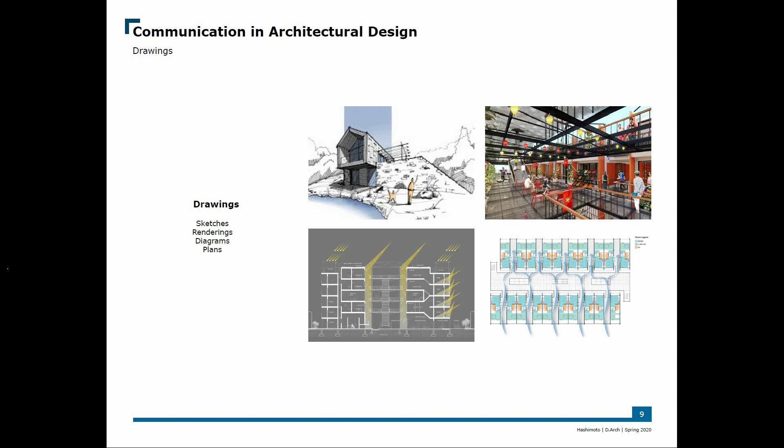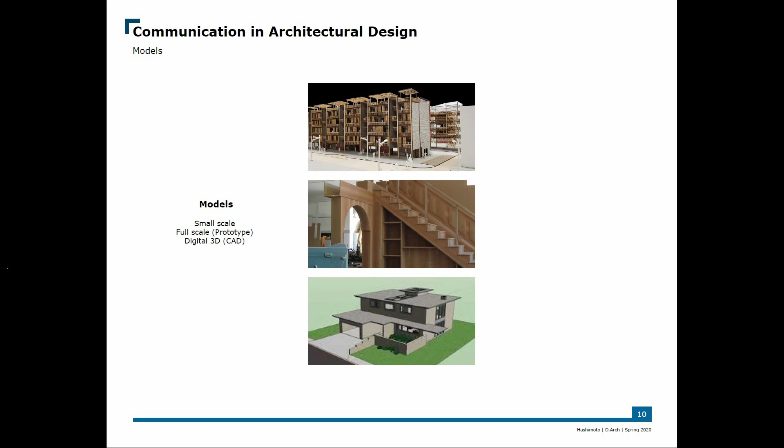Michael Polanyi informs that tacit knowledge plays a critical role in social communication, which is directly relative to the collaborative design process and communication. The integration of tacit knowledge may be reflected in the role of the designer and how they graphically represent intended designs. When the designer is conveying that idea, it is left for the client to reinterpret and articulate the embodied design intention. Those intentions may be lost or otherwise altered during the translation.

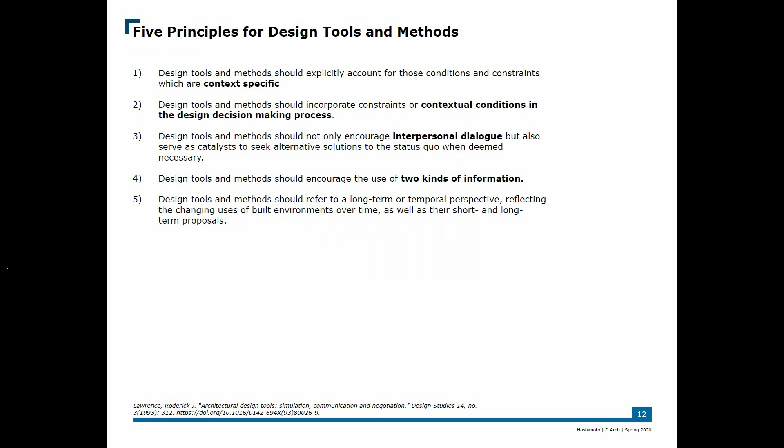Various design simulations such as drawings, physical, and digital models have been primary media for architectural design communication. Roderick J. Lawrence synthesized a set of principles towards the applications of design tools and methods. From these principles came about design communications methods in the form of tacit criteria. Real-time feedback, where users, clients, and professionals are encouraged to engage in interpersonal communication to enhance the quality of design decision-making.

Context-specific, where users, clients, and professionals alike are able to experience design in proper context, accounting for existing site conditions. Full-scale immersion, where users, clients, and professionals are able to experience the design's proper scale, allowing interaction with the space prior to project implementation. An overview of the following standard practices of design communication have been investigated with respect to the embodiment of tacit characteristics.

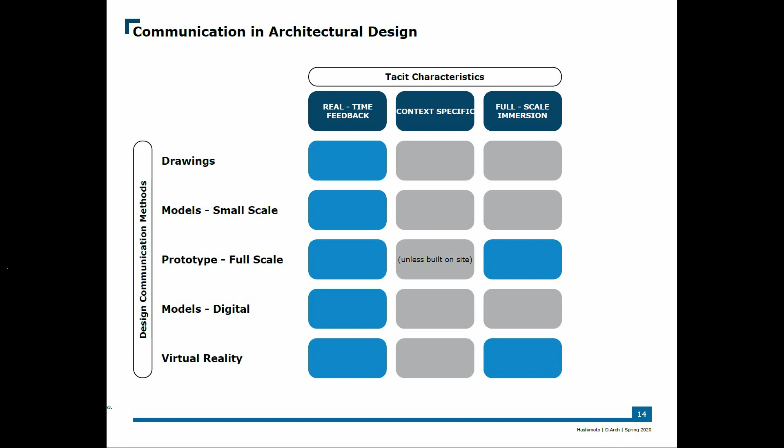While conventional 2D drawings, typically seen on paper or on screen, conceptually deliver a sense of building form and scale, model integration serves to simplify design interpretation. With models, however, unless built in full scale and in context, the scale interpretation in models becomes difficult for many laypersons. The integration of virtual reality serves as an alternative medium complementing digital model making as it allows users to virtually walk through the design environment.

Yet, although virtual reality simulations provide a full-scale experience, they lack real-time context data. With the recent developments made in the field of augmented reality, or AR, specifically highlighting the use of smart devices, the goal is to showcase its potential for AR to become an alternative media in capturing tacit knowledge during the collaborative design process and communication.

AR is defined as the digital information that is displayed and overlapped onto the physical environment, creating an enhanced reality for users to perceive. Augmented reality allows designers to convey their ideas three-dimensionally through an environment that works to combine both digital and physical realities. The purpose for the use of augmented reality in architecture practice is to promote the embodiment of the user's tacit experience, such as real-time feedback, context-specific, and full-scale immersion during the duration of the project.

This investigation, however, does not intend to replace conventional design communication media, but instead it introduces SDAR applications as an additional layer where deemed appropriate and expand the current toolsets that are readily available. Augmented reality, however, is not a new concept. The first appearance was seen in 1950. Over the years, technology has evolved from bulky machines to sophisticated pieces of technology.

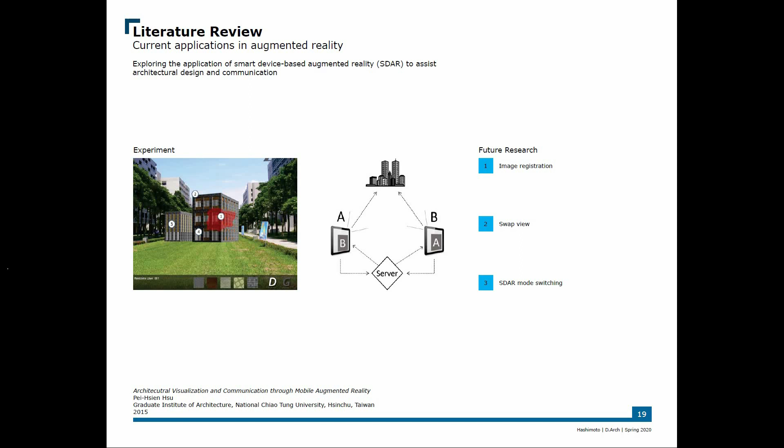Additionally, designs are reflected across multiple devices so that the design teams and clients can view the same design from multiple viewpoints on the site. The multi-device application may also be reflected in the studio setting where design iterations may be made to view instantaneously. Industry experts identified 9 key areas of potential applications. Ranked in order, the highest application is to improve communication between architect, contractor, and subcontractor. However, this should not only encompass the professionals, but should as well include the clients into the communicative circle.

The research outline for this project consisted of a series of applications to aid in the development of 3 scenarios: 1. Architecture element visualization. 2. Holographic assembly. And 3. Fenestration design with daylighting metrics through smart device augmented reality.

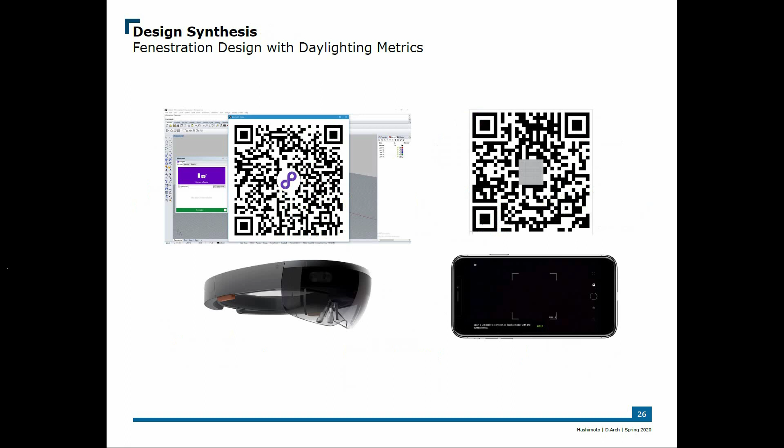The basis for each scenario consisted of Rhino 3D to be used for the creation of geometries, Grasshopper 3D to parameterize these geometries, and Fologram to augment objects from 3D model space into the physical environment, as well as synchronizing parameters onto the device's interface. The following scenarios showcase how tacit knowledge of real-time feedback, context-specific, and full-scale immersion are derived to support user implementation.

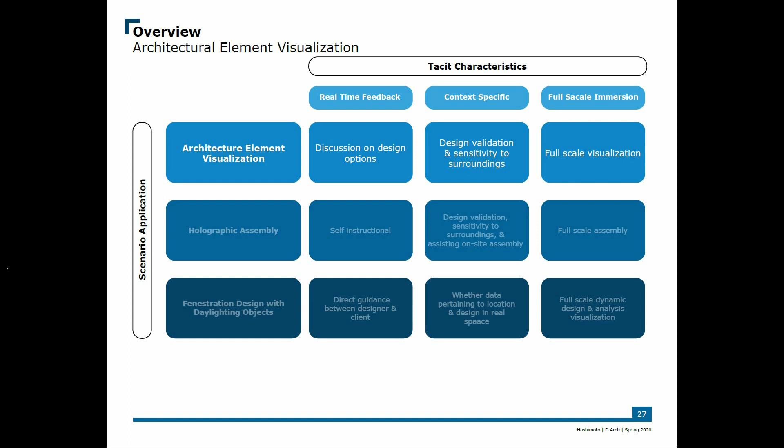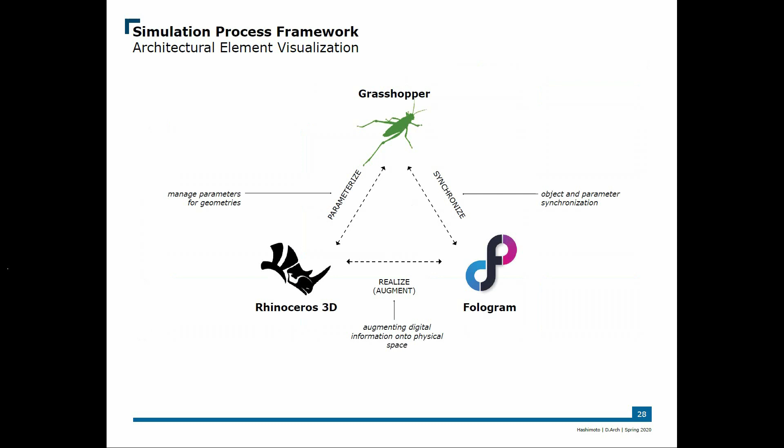Scenario 1 proposes an architectural element visualization for the School of Architecture's auditorium. The use of the smart device augmented reality will assist in the design development process by augmenting where the proposed set of designs will be located. The proposed application consists of 1. The initiation of SDAR, 2. The creation of architecture element, and 3. The visualization of architecture element.

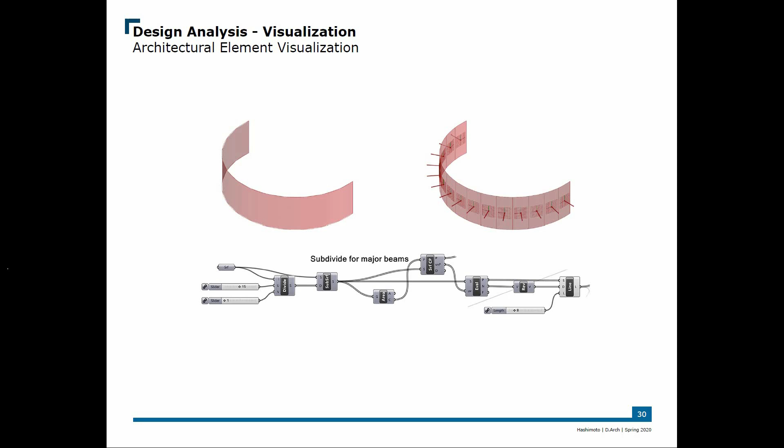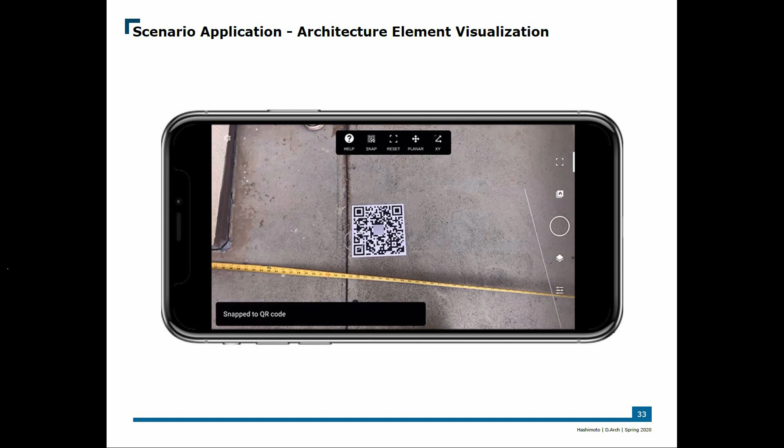Given the design options created by the designer, they may allow the user to view the design both in context and in full scale. Through the screen of a smart device, while toggling between design options via parameters and layers, a recipe is made for conversation. Placement setup of the document's origin in order to project the proposed design onto the curved wall of the auditorium.

Not only can the users and clients view the design, but they can also experience it while walking through full-scale immersion. They can also view it against the surrounding context, as well as interchanging the design option. They can also control the parameters, increasing or decreasing the density of the trellis. The application's versatility to be utilized in the design studio setting allows for quick iterations to be made on CAD programs and will automatically be reflected onto augmented models.

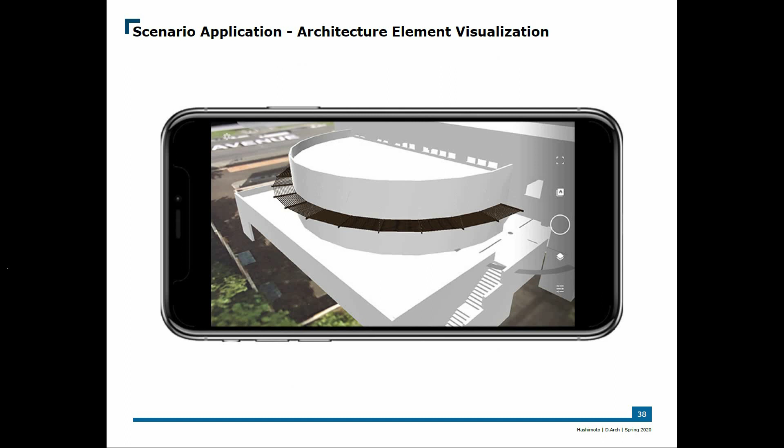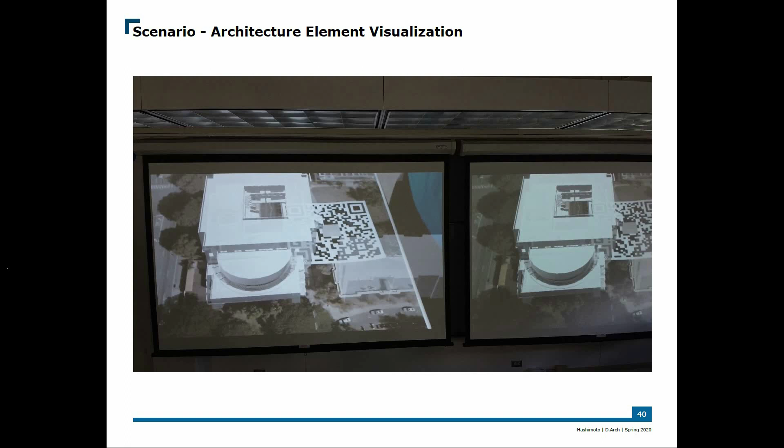The headset also provides a function to live sync to the Microsoft HoloLens app on a PC or desktop. This may be used to project to a larger conference screen. This is most beneficial when in a design studio setting or work setting or any setting that involves a large body of people for presentations. Scenario 1 architecture element visualization proved to be valuable as clients are able to articulate design skill much easier in relation to its surroundings.

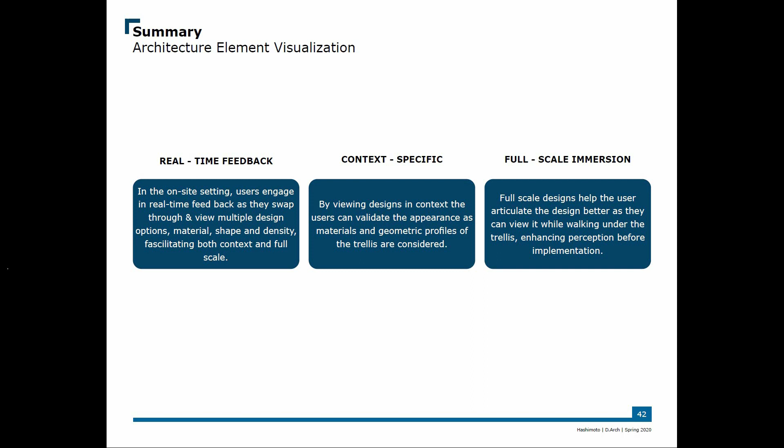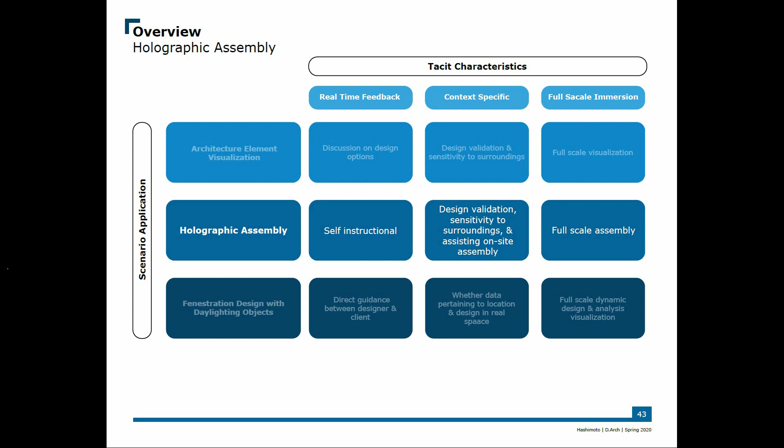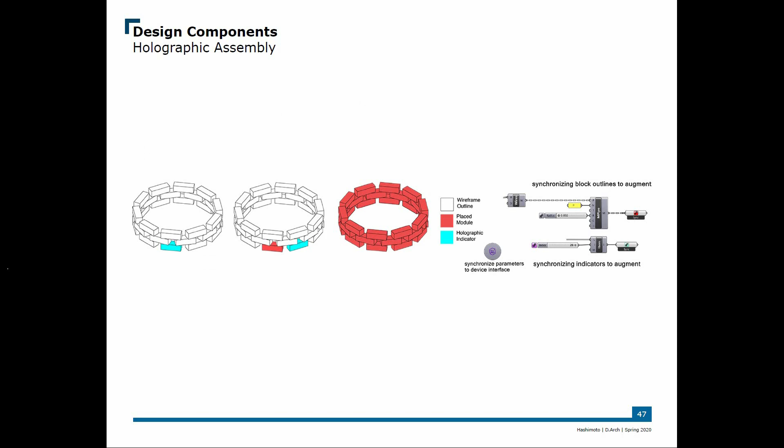A holographic assembly revisits the tacit criteria as it enables users to augment a holographic set of instructions to assist a modular assembly process. The framework for the application of smart device augmented reality consists of 1. Initiating the smart device augmented reality application, 2. The development of the proposed structure, 3. The overlay of the digital objects, and 4. The assembly of the structure in the physical environment. This method proposes to cut down on time, errors, and subsequently costs for the duration of the project.

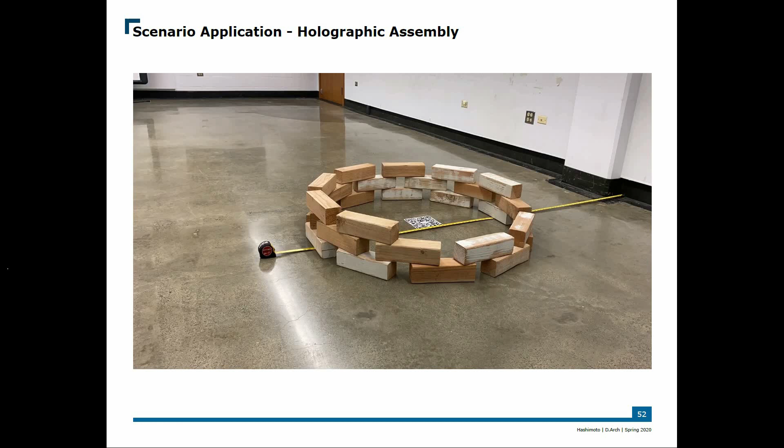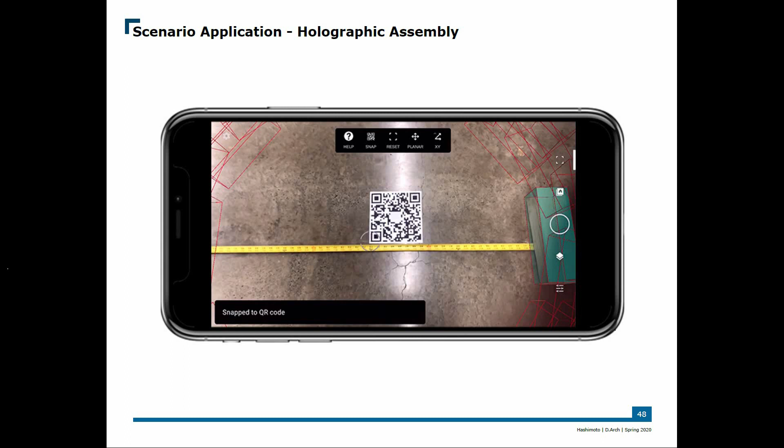The use of the HoloLens will be critical during this scenario as it frees up both hands for the user during assembly. It is not to say that smart devices are incapable of doing the job, but it is instead more efficient for a headset to be used during assembly. In fact, the smart device may excel and serve for its user interface, while at the same time viewing the digital model and the physical space.

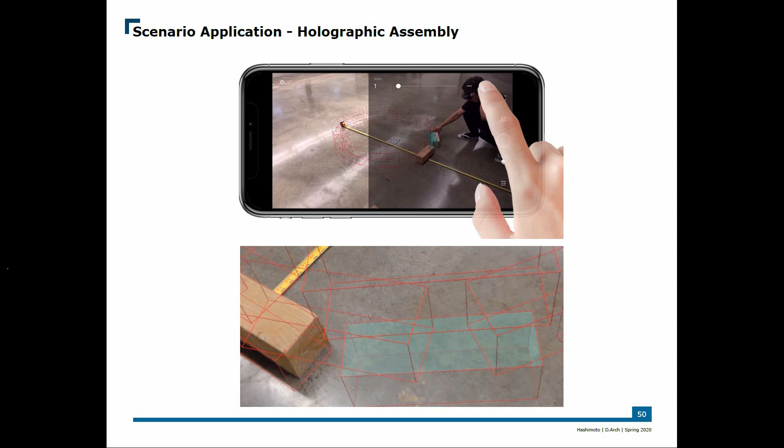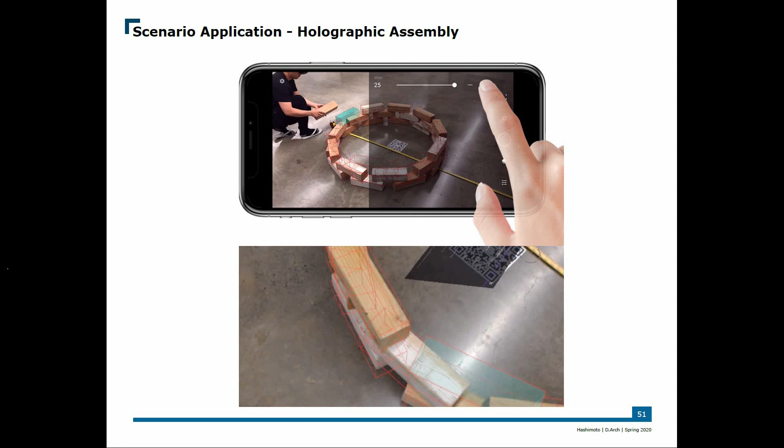Handling the blocks through HoloLens, smart device users will be in control of indicating the next piece to lay by toggling the slider. Working in unison, both the HoloLens and the smart device work to strengthen each other as these devices perform less as individuals and instead more as a whole.

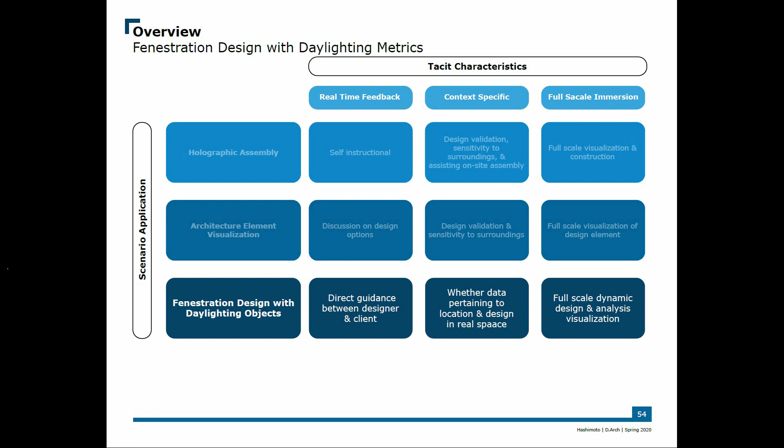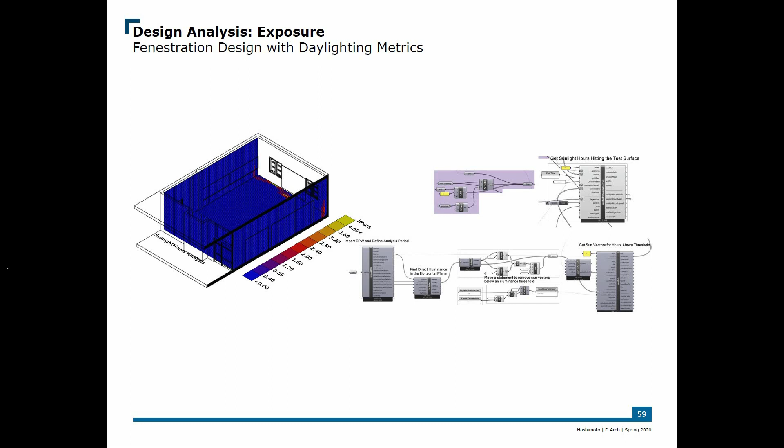While directly applying the use of smart device augmented reality in the design process for interior daylighting, the user will be actively engaged in the design process. This allows for communication between users and designers about design intentions with real-time feedback simulations. The proposed application for Scenario 3 consists of 1. The initiation of SDAR, 2. The analysis of daylighting metrics, 3. The synthesis of the fenestration, and 4. The simulation of the synthesis outcomes.

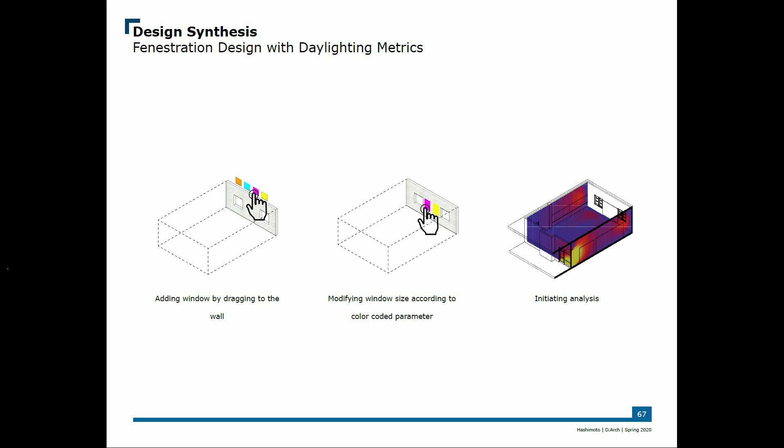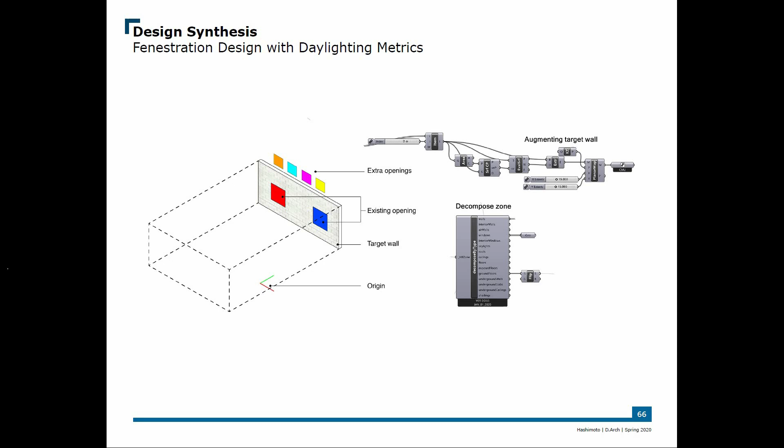Aside from engaging the user into visualizing the outcomes, the focus here is to engage the user directly into the design itself. The user will be in full control of the actions taken while they are being overseen by the mentor, aka the designer. This is achieved by allowing the user with professional guidance to 1. The addition and deletion of the openings, 2. The translation of their location, and 3. The modification of their sizes.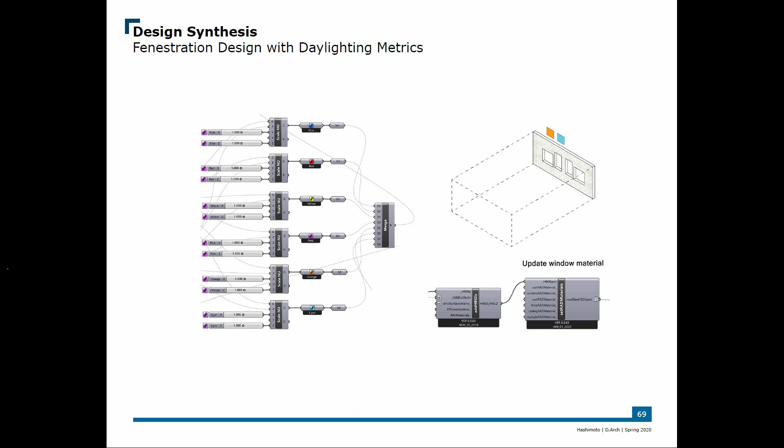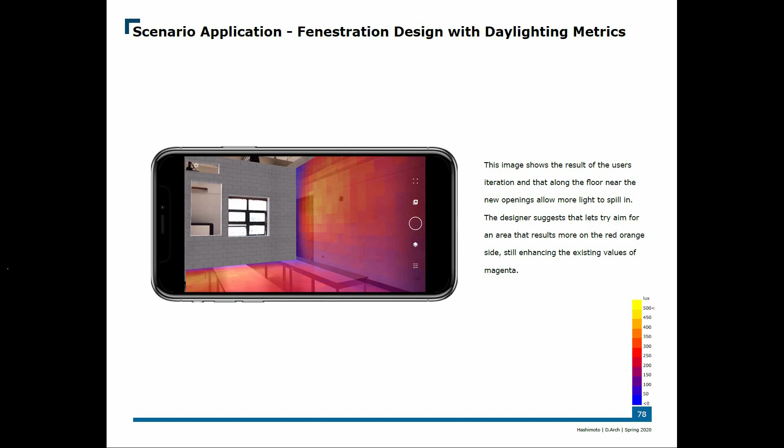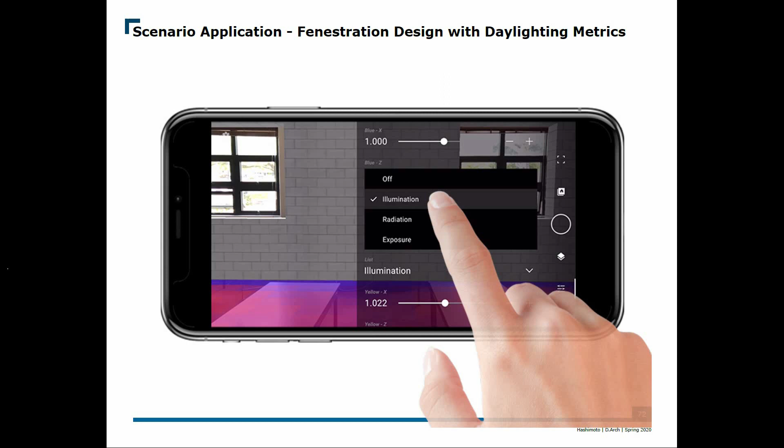After the synthesis, the user reinitiates the simulation to see how their new opening configuration would affect the daylighting analysis results in conjunction with the real-time environment. Like Scenario 1 and 2, the location setup requires a QR code to place the model. Before making any changes, the first analysis is on the current design of the openings. After running the first analysis, the user may start to make modifications to the wall, adding, subtracting, changing sizes, and once again, they can run the analysis according to new changes.

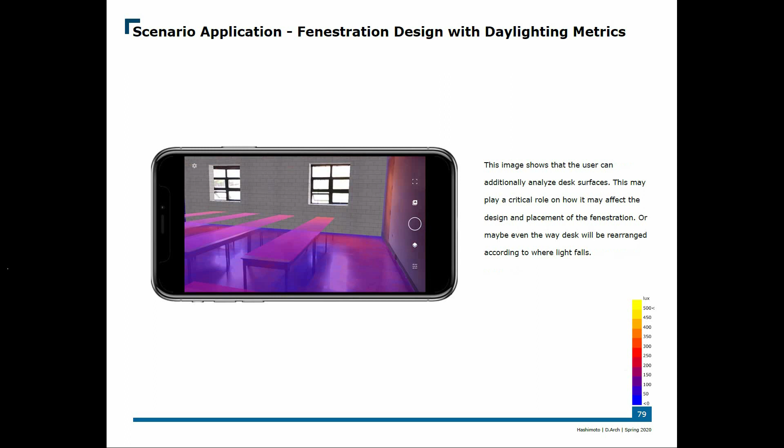To reiterate, successful projects are the result of the architect-client relationship, where the relationship is born through a client's understanding of architectural understanding, because they undergo a state of habitus shock. And in order to realign projects' visions and goals, it is recommended for designers to integrate design tools that will cultivate the architectural tacit understanding. Augmented reality can serve as a catalyst to support tacit criteria in design communication.

Achievements were made across all 3 scenarios. In architectural element visualization, what was achieved was that the user was able to walk under the trellis, viewing the full scale and in context. The user was able to toggle design options, viewing multiple designs. The user also was able to adjust the parameters for design type specific iterations. Multi-device connections were reflected across all connected platforms in a studio setting, and also as a live sync to presentation screen for the audience to view.

In a holographic assembly, what was achieved was that the teamwork between HoloLens and smart device was in unison. The smart device user was controlling the block indicators that allowed the HoloLens user to be hands-free. And lastly, in fenestration design and daylighting metrics, what was achieved was that the design directly was driven by the client, who was also mentored by the designer.